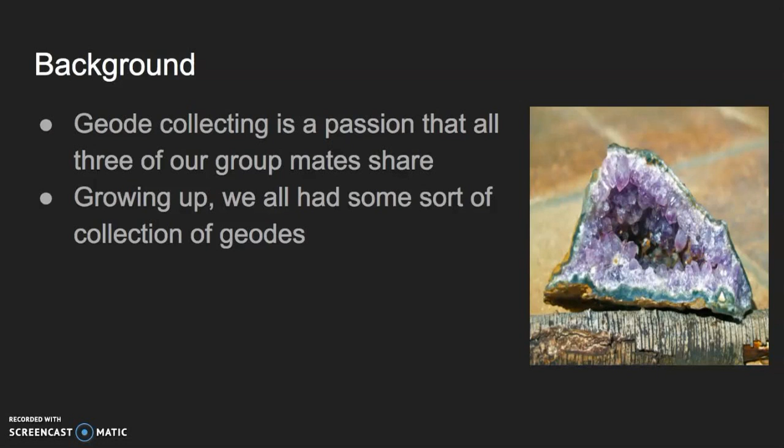Geode collecting is a passion that all three of our group mates share. That's exactly why we chose this project. Growing up, we all had some sort of collection of geodes, usually from coming home from a trip to the mountains. We realized that it can be very difficult for someone to crack a geode, especially children and elderly people, and we want everyone to be able to follow their passion, no matter how old they are.

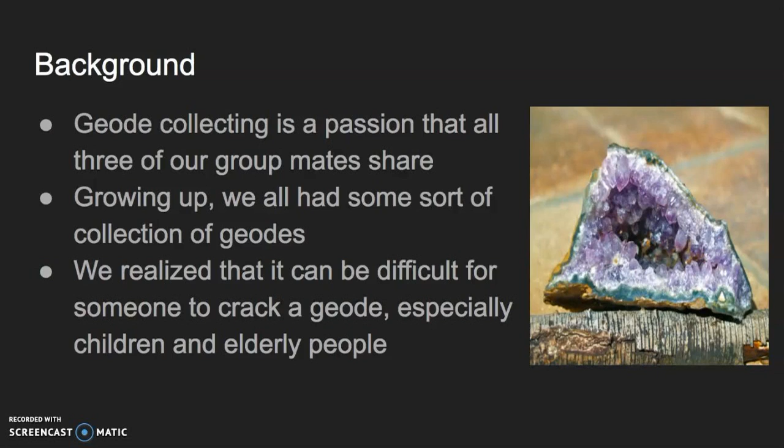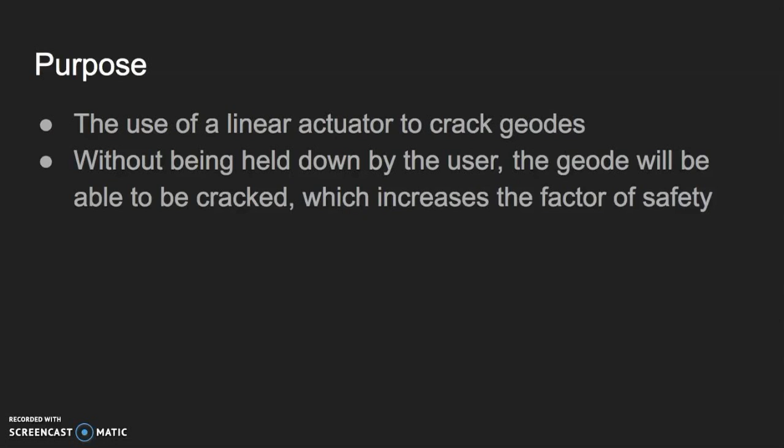So we decided to make this linear actuator. Its purpose was to crack geodes. Without being held down by the user, the geode will be able to be cracked, which increases the factor of safety. Normally when cracking a geode, you have to hold it with one hand, take a hammer or a pipe, something heavy, and hit it until it cracks. It is very possible to hit your hand and cause an injury, and that is something you do not want to do.

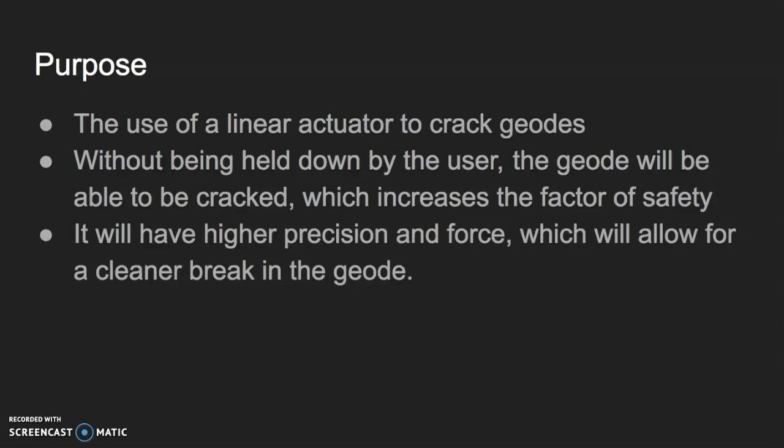The linear actuator will have a higher precision and force, which will allow for a cleaner break in the geode. So our experiment consisted of 3 phases: the assembly phase, the programming phase, and the experimentation phase.

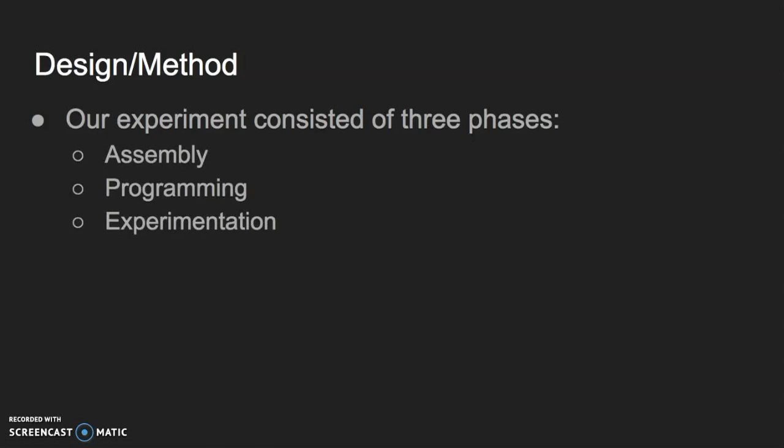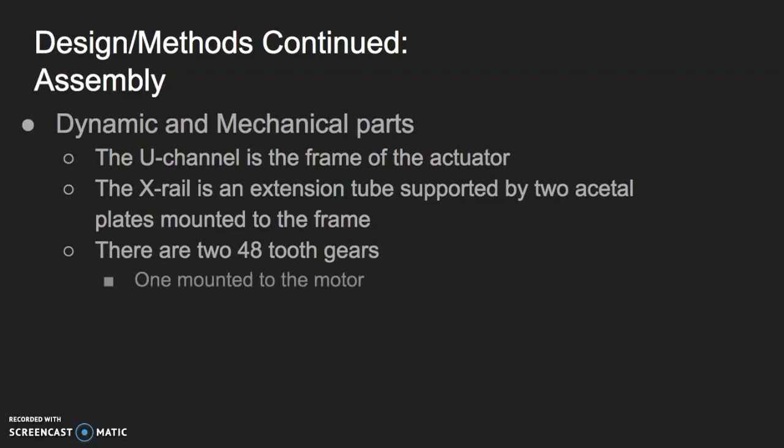So in our assembly phase, we've had dynamic and mechanical parts, a whole lot of them. The U channel is the frame of the actuator. The X rail is an extension tube supported by 2 acetal plates mounted to the frame. There are 2 48-tooth gears, one mounted to the motor and the other mounted to the X rail.

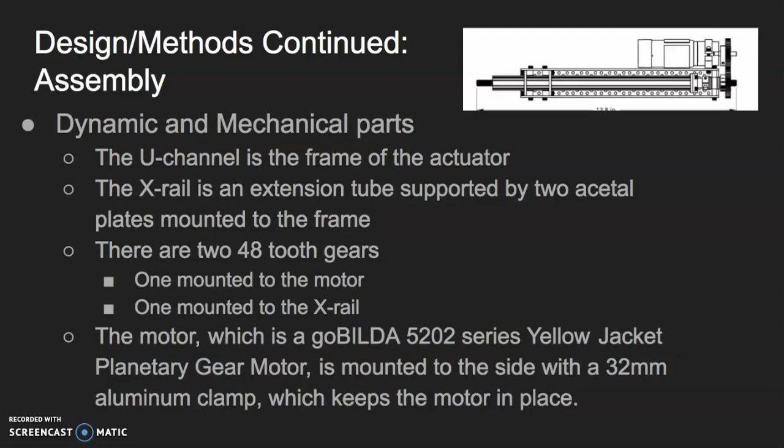The motor, which you can see listed here, is mounted to the side with a 32mm aluminum clamp which keeps the motor in place while it's running. Here you can see the X rail before it's extended, and here you can see it after extending, as well as the 48-tooth gears.

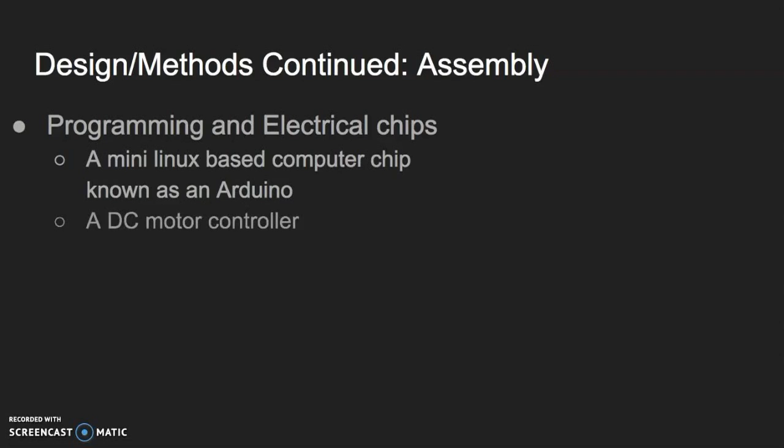There's a whole lot of programming and electrical chip work that also had to go into this project. We used a mini Linux-based computer chip known as the Arduino, more specifically the Arduino Uno. We also used a DC motor controller, a Bluetooth chip, and an 11.1 DC battery.

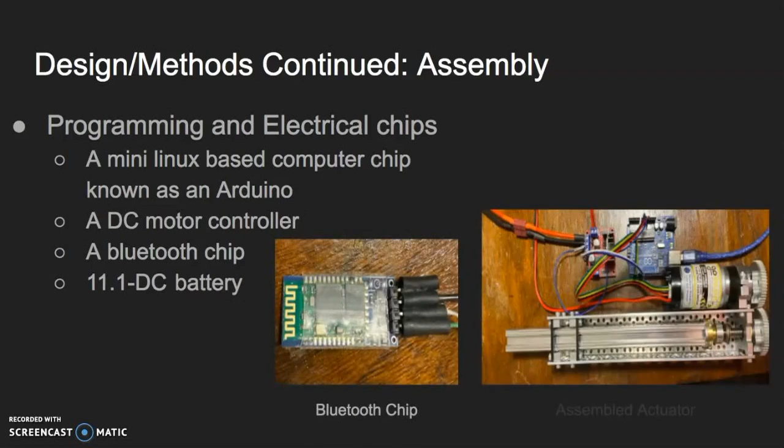Here you can see the Bluetooth chip, and here you can see the fully assembled actuator.

So now let's talk about programming. In order for the motor to work at varying speeds and extrusion lengths, some programming was necessary for the Arduino and Bluetooth chip. The program shown here is what allows the motor to change velocity and extrusion length. The motor is given a numerical speed and extrusion length with a dead zone to prevent it from burning out if the extrusion length is at its maximum.

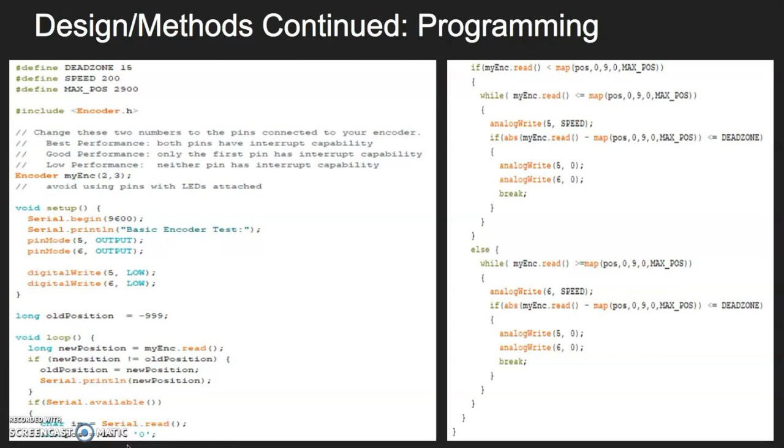The motor is capable of running 1150 RPM, which is equivalent to 120.43 radians per second. At maximum speed allowed, the X rail will have a velocity of 6 inches per second and a maximum force of 50 pounds, which converts to about 220 newtons.

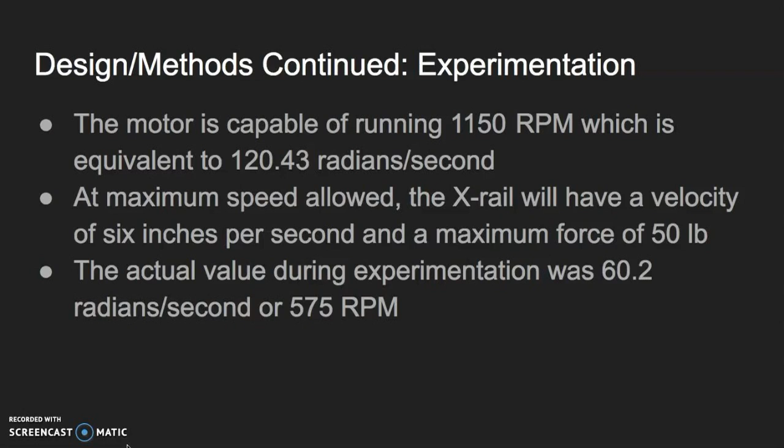The actual value we used during the experimentation was 60.2 radians per second, or 575 RPM. Here you can see the governing diagram.

We used 8 trials with increments of 12.5% to test the gear slippage and to see what our best power rate would be. Our calculations showed that the most effective rate would be half of the maximum angular velocity, which is correct based on our trials, because at any rate higher than 50%, the gears slip more, and under that, they all slip the same.

It was also found that the goBILDA linear actuator was more effective at lower speeds, and even at lower speeds, it still has the same force output. It just moves slower.

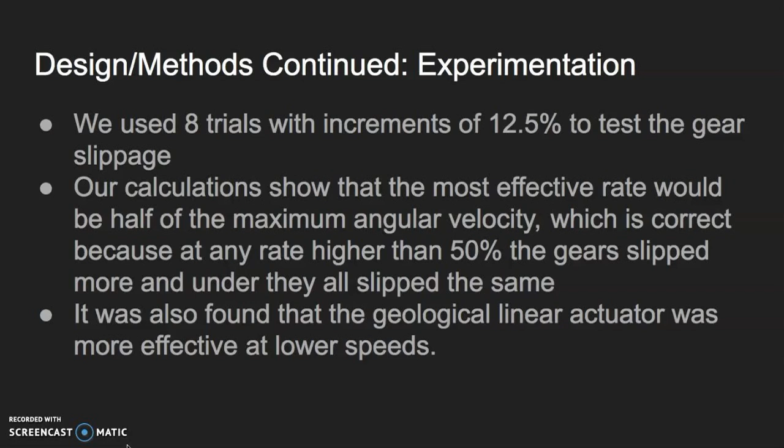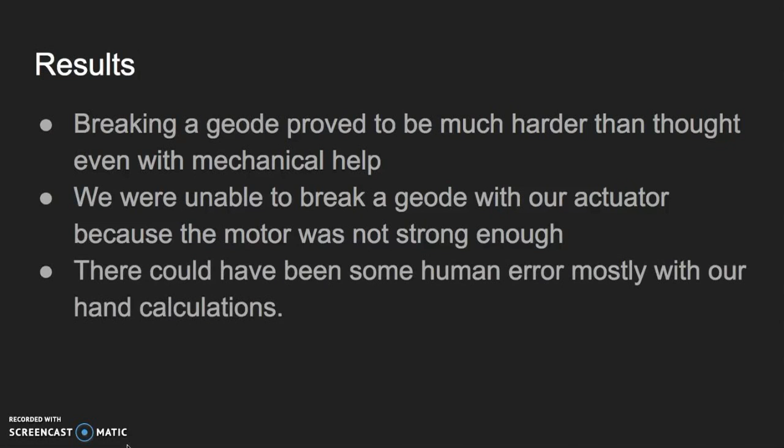So for our results, it ends up that breaking a geode proved to be much harder than we thought, even with the mechanical help. We were unable to break the geode with our actuator because the motor just was not strong enough. There could have been some human error as well when it came to our hand calculations, so maybe the force just wasn't right.

So in conclusion, we found great success in the actual building process of the actuator, but the programming is where we struggled, which is exactly what you'd expect out of 3 mechanical engineering students.

After completion of this project, we would recommend using an air compression system over using an electrical motor. The motor we used honestly just wasn't powerful enough to break the geode, and it is not feasible for real-world application, at least not what we did.